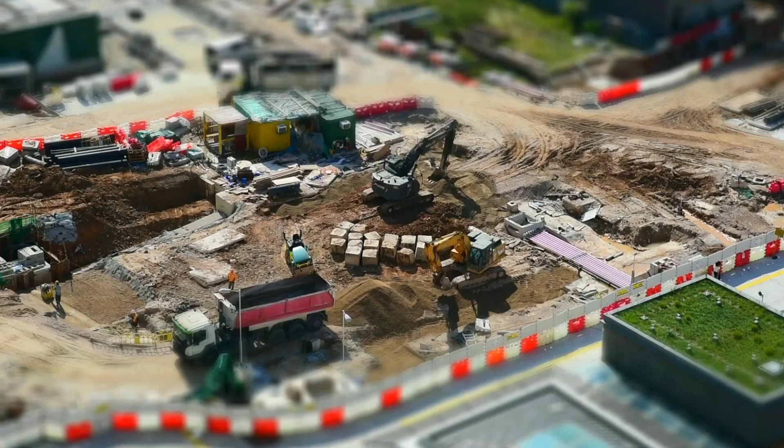About the S56 Certificate of Fitness: it is required where a Site Safety Manager or Site Safety Coordinator is required by the building code for a construction site. This Certificate of Fitness is valid only at a specific location and for the specific person to whom it is issued. The S56 exam will consist of 60 multiple-choice questions, administered on a touchscreen computer monitor.

It is a time-limit exam. Based on the amount of questions, you will have 90 minutes to complete the test. A passing score of at least 70% is required in order to secure a Certificate of Fitness from the FDNY. Applicants will be given two opportunities to take and pass the S56 test. After the second failure, applicants must repeat the CSFSM course and begin as a new applicant.

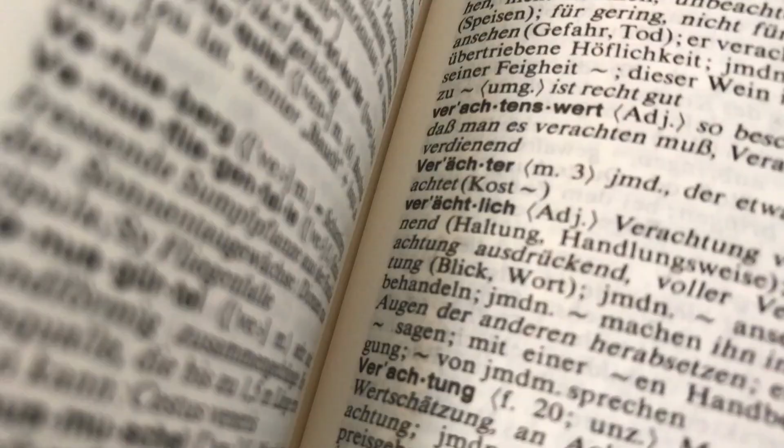Part of your job will be to conduct the required patrols and inspections, and for you to complete the required paperwork. This paperwork must be readily available upon FDNY inspection. Some are required to be done daily, while others weekly or monthly. Nevertheless, that is one of the most important job functions you have on the worksite.

Where a Site Safety Manager or Site Safety Coordinator is required by the building code, the owner shall designate a person to be the Construction Site Fire Safety Manager, CSFSM. The CSFSM shall be present at the construction site at all times when construction, alteration and demolition work is being conducted. The Fire Safety Manager shall sign in the logbook required at the beginning and end of each workday. In our training class we will go into much more detail in the first chapter, and review fire codes and building codes.

The Construction Site Fire Safety Manager, CSFSM, shall develop and maintain at the construction site an approved pre-fire plan, and make it available for examination by any representative of the fire department. The purpose of the plans is to establish a method of systematic, safe and orderly evacuation of an area and of its construction site personnel in case of fire or other emergency, in the least possible time to a safe area or by the nearest safe means of egress. It is also to ensure the readiness and use of available fire protection equipment.

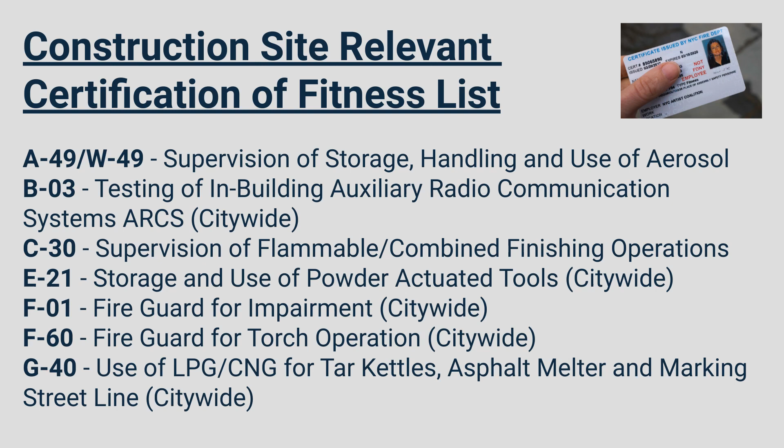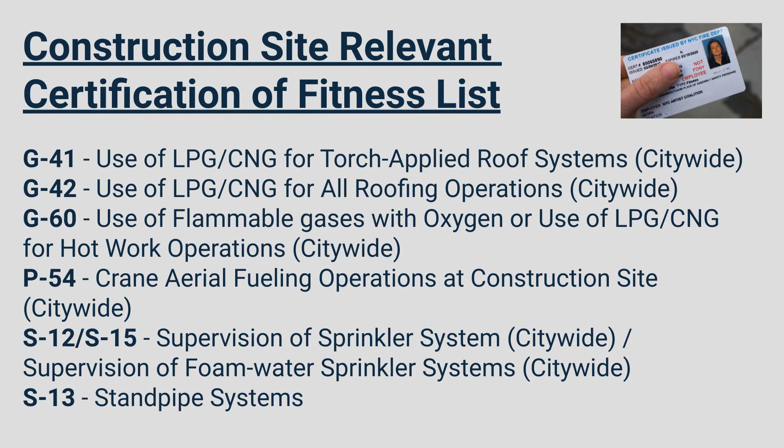There are many FDNY certificates of fitness. Many questions will come from these and you should know them for the job site. Here is the last list, for review.

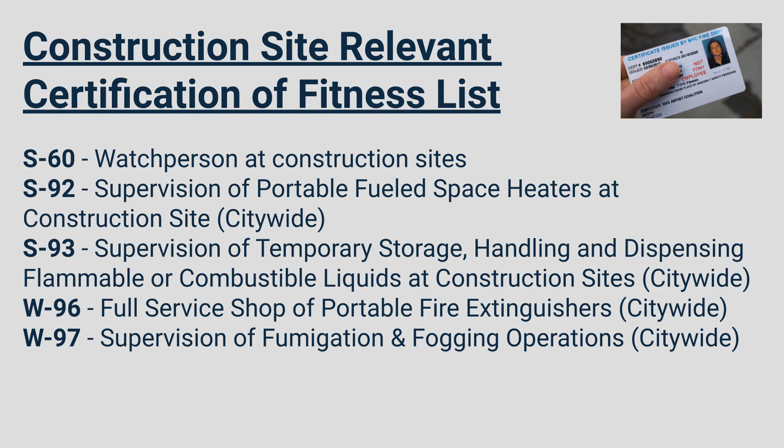Your job will be to ensure the workers have the required license for the particular jobs. We shall also review the types of FDNY permits, permanent permits or temporary permits.

There will be several test questions on permits. Permanent permits are valid up to 12 months only. Every permit or renewal shall require an inspection and shall expire after 12 months. Temporary permits may be valid from 1 day to 12 months, depending on the construction or operation need. Such permits authorize the permit holder to manufacture, store, handle, use or sell hazardous materials or combustible materials, or conduct an operation or maintain a facility at a specific premises or location, for which a permit is required by the Fire Code.

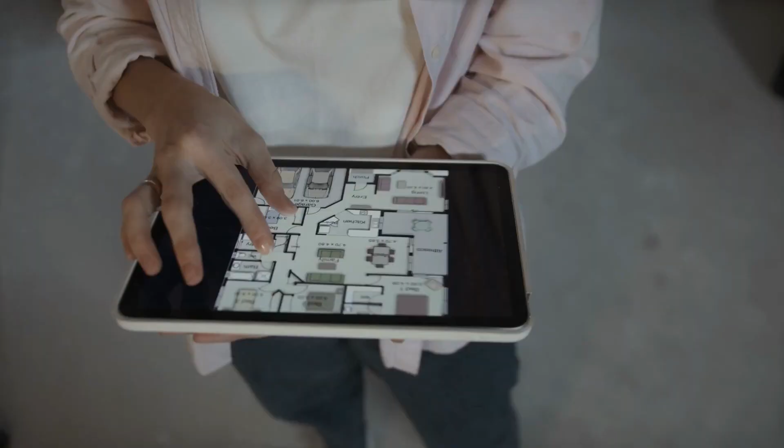We shall also review citywide permits and transportation permits in the class. For citywide permits, the duration of such activity at any individual location does not exceed 30 calendar days, and all hazardous materials associated with such activity are removed from the location at the end of the workday.

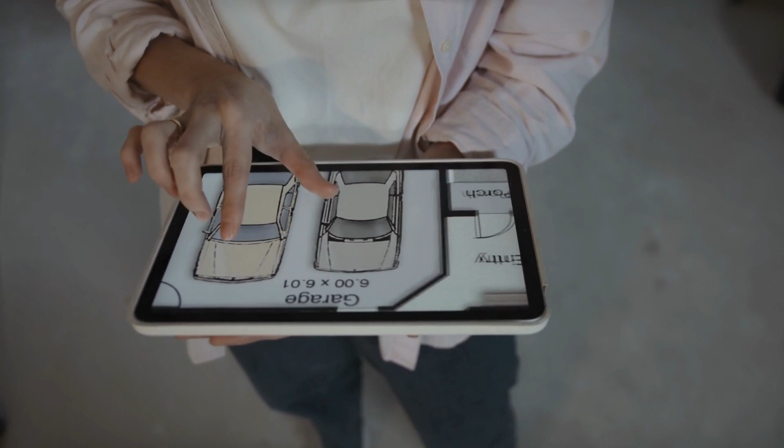The transportation permit authorizes the permit holder to transport, pick up and deliver hazardous materials. Any person who transports any hazardous material in the quantity requiring a FDNY permit has to apply for a FDNY transportation permit. The FDNY transportation permit sticker must be displayed on the vehicle.

The fire safety manager must ensure that all fire protection equipment and systems, such as standpipe system, fire department connection, air pressurized alarm system, sprinkler system, and fire extinguishers, are readily available and periodically inspected, tested, and maintained in accordance with the NYC Fire Code, the NYC Fire Rules and the NYC Building Code. We shall also discuss main control valves, fire department connections, sprinkler and standpipe systems more in the training class.

Out of service means that the system is not in working order, either because it unexpectedly malfunctions and/or because it is being temporarily removed from service for repair, maintenance or construction. A fire protection system must first be operational, installed and approved before it can be out of service. An impairment coordinator or firewatch is not required before the system is installed and approved.

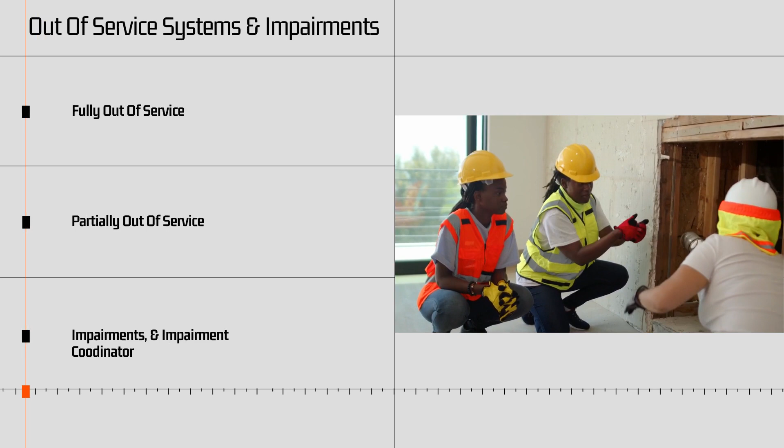The impairment coordinator must maintain records of all system inspections, tests, servicing and other items of maintenance, to be kept on the premises or other approved location for a minimum of 3 years and made available for inspection by any member of the FDNY. The course shall review the different classes of fires, such as Class A, Class B, Class C, Class D, and Class K.

A firewatch must be maintained when a standpipe system, sprinkler system, or fire alarm system is out of service. The number of fire guards generally depends on the location and the size of the area affected by the out-of-service fire protection system. A fire guard should be available to patrol all areas in which the fire protection system is out of service at least once every hour. No individual fire guard should patrol more than 50,000 square feet of building floor area.

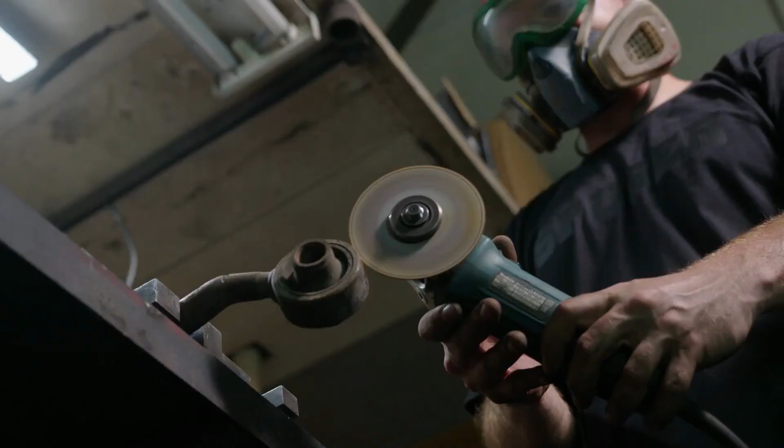This class shall go into more details for hot work and firewatch. Hot work creates sparks, slag and heat. Materials such as acetylene, LPG, and oxygen are used in gas welding and torch operations. Electric current is used in arc welding. An FDNY permit is required to conduct hot work using oxygen and a flammable gas, or using LPG or CNG gas only.

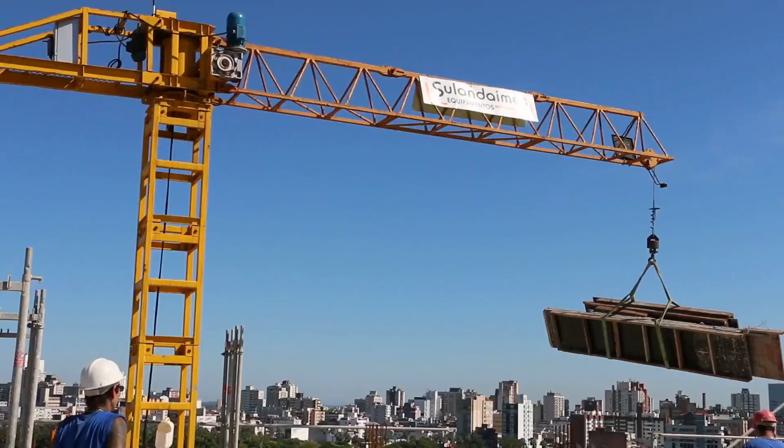A certificate of fitness holder for crane aerial fueling operations, P54, must be present at all times at a construction site when the crane aerial fueling operation is in progress. Inspections of fueling equipment, checking weather conditions, checking communications, checking the method of discharge, checking for any fire or fuel source, and checking the fueling of the crane must be performed.